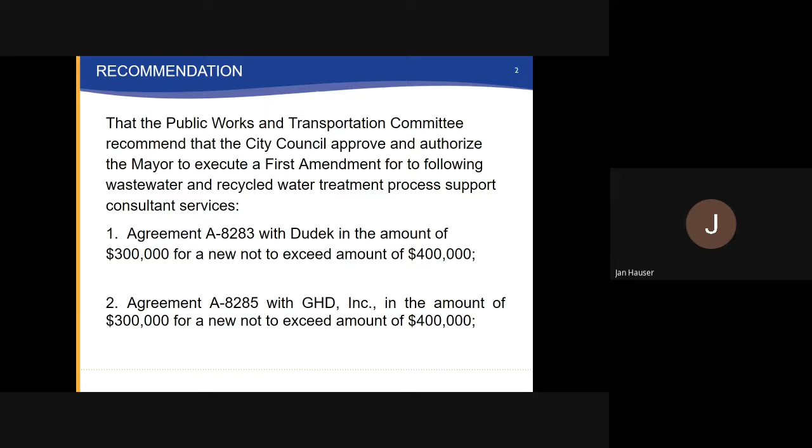One, Agreement A-8283 with Dudek in the amount of $300,000 for a new not-to-exceed amount of $400,000. Two, Agreement A-8285 with GHD Incorporated in the amount of $300,000 for a new not-to-exceed amount of $400,000. Three, Agreement...

A-8287 with Kennedy Jenks Consultants in the amount of $300,000 for a new not-to-exceed amount of $475,000. And Agreement A-8289 with Carollo Engineers in the amount of $300,000 for a new not-to-exceed amount of $475,000.

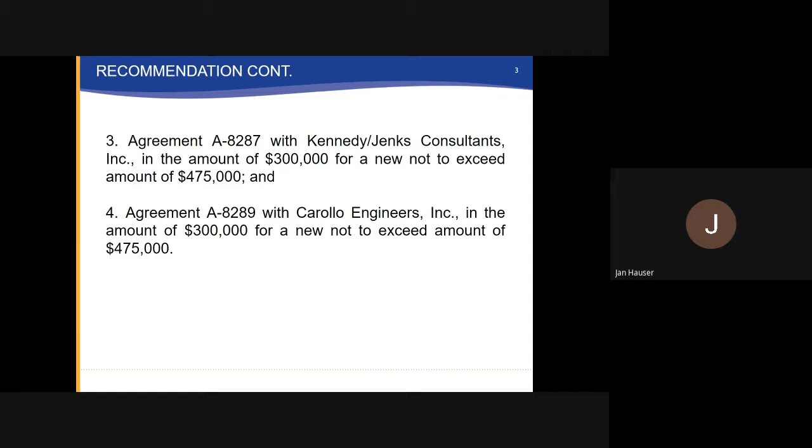As we all know, the city of Oxnard owns a wastewater treatment plant, which has a design capacity of 31.7 million gallons per day. It's a fairly complex operation. The treatment consists of a number of unit processes, including preliminary and primary treatment, secondary treatment, chlorination, dechlorination, and ocean discharge, among many other processes at the plant.

We also own the advanced water purification facility, which can produce up to 6.25 million gallons of highly purified recycled water per day. The AWPF is also a fairly complex operation, including microfiltration, reverse osmosis, and advanced oxidation treatment.

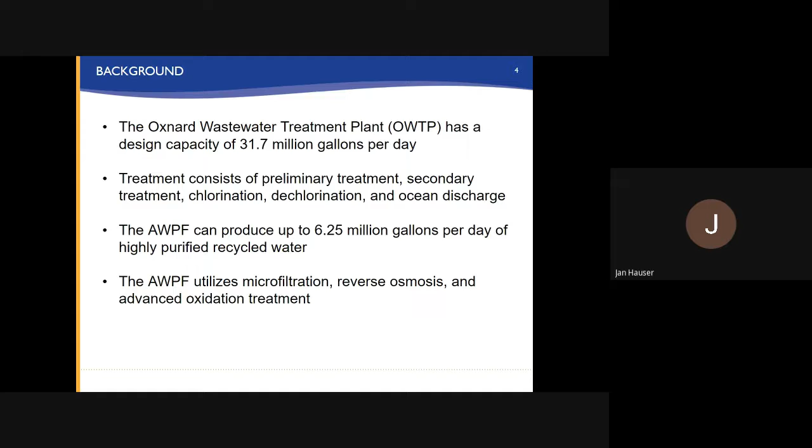On February 16th, 2021 and March 16th, 2021, so approximately one year ago, the City Council approved the following four agreements for on-call wastewater and recycled water process support.

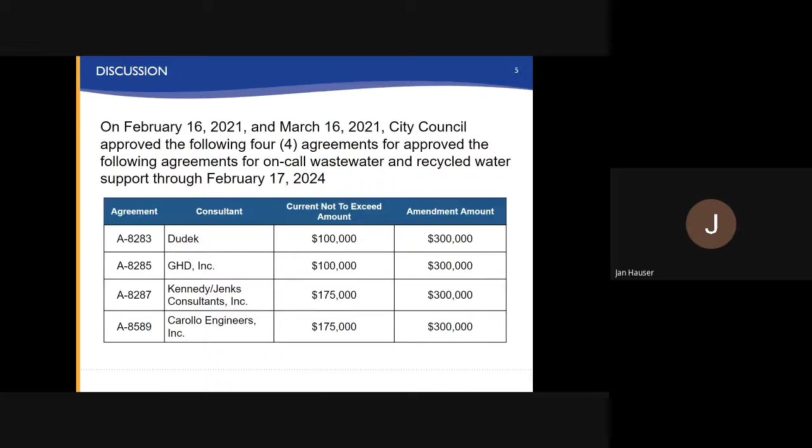Since that time, this has been incredibly useful and helpful. These have been very useful contracts for us. We've used all four consultants for a number of things shown here in this table.

We've done a flow meter evaluation at the wastewater treatment plant. We've completed a structural evaluation of a solids thickener at the plant. We have used Carollo for help with regulatory compliance. We've started to do underground utility mapping.

We are optimizing our new treatment facility called Chemically Enhanced Primary Treatment, which was just put in about a year ago and went online about a year ago. We've looked at backup power for one of our main pumps.

That evaluation has been completed. We're doing a planning study to expand our existing maintenance building, and we are in the process of developing site-specific limits for our existing industrial users.

Through these projects, we've used up most of the existing contracted amounts on each contract. So we see a continuing need for these services, and we are asking for additional amounts to be added to their contracts to complete studies, evaluations, technical guidance, consultation, and other things that may be required.

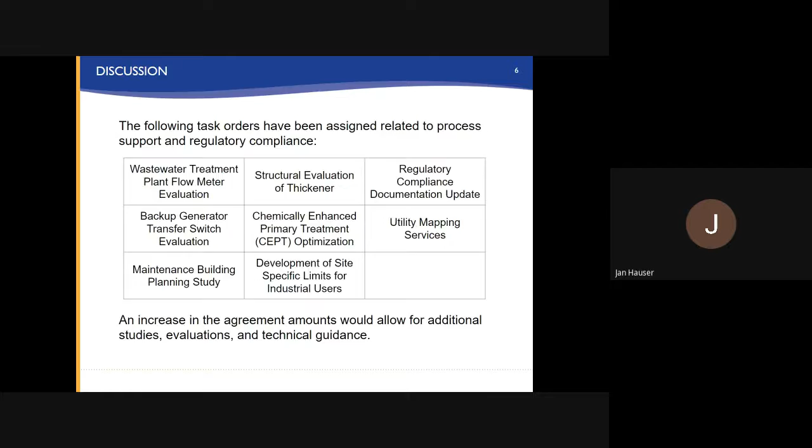I'm just going to show you a few pictures now of the facilities they work on. This is our chemically enhanced primary treatment facility. It went online, like I said, about a year ago.

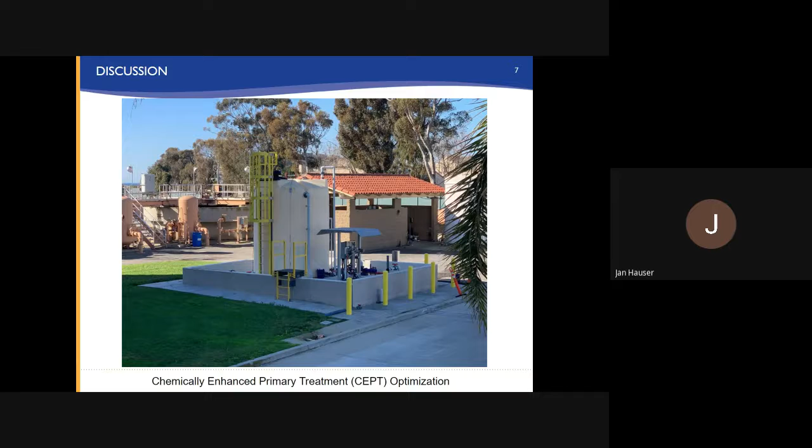There have been challenges with making it work properly, so we have one of our consultants, GHD, on board to help us optimize this facility. This is to improve our treatment process.

This is the primary solids thickener that we had a structural analysis done on. This facility was built in 1955, and we're about to put it back in service, but we wanted to make sure it was structurally sound. That has been completed, and we should be putting this back in service in the next month or so.

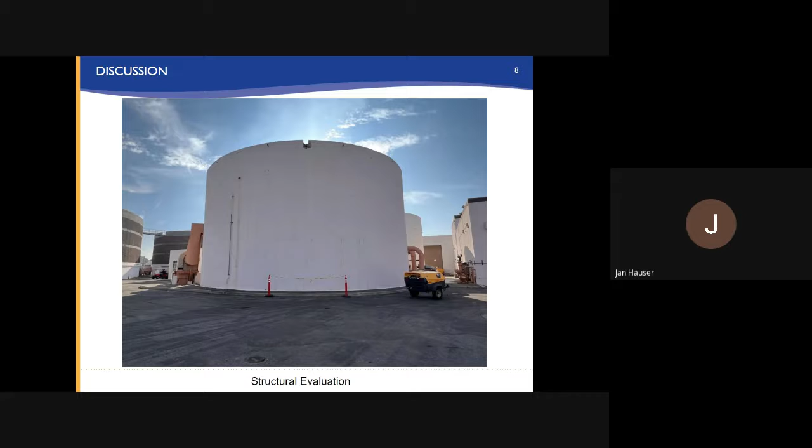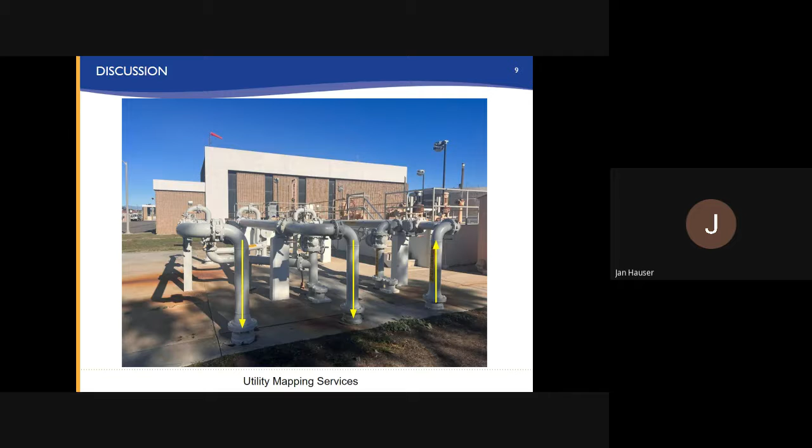We have undertaken a fairly substantial task to create a master underground map for the facility in AutoCAD. We are nearing the completion of that project.

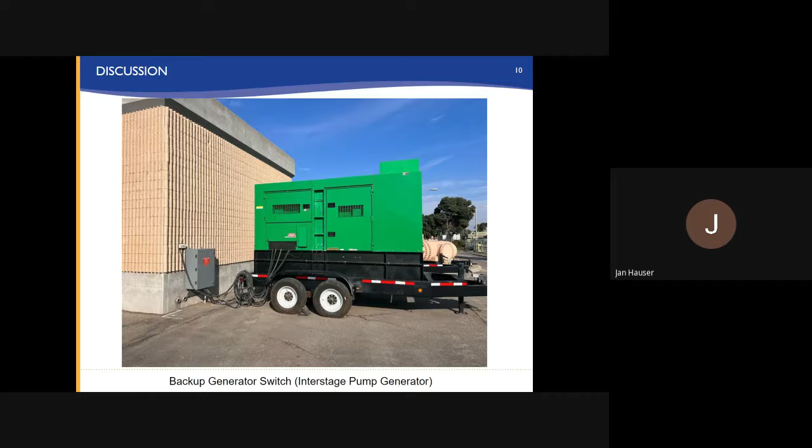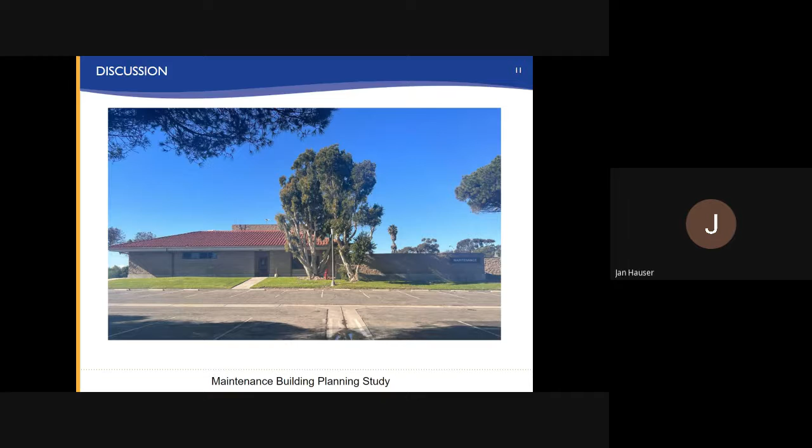This is our maintenance building. It was built in 1978. Staff has increased by more than two times since that time, and they are out of space. They need additional space, so we are having a study done to see if we can expand this facility in the future.

The financial impact: the total amount of each agreement shall not exceed the amounts listed below, through the term of February 17th, 2024, which is in their original contracts. That is not changing. Each project is done through a task order that we plan for every year in the budgeting process.

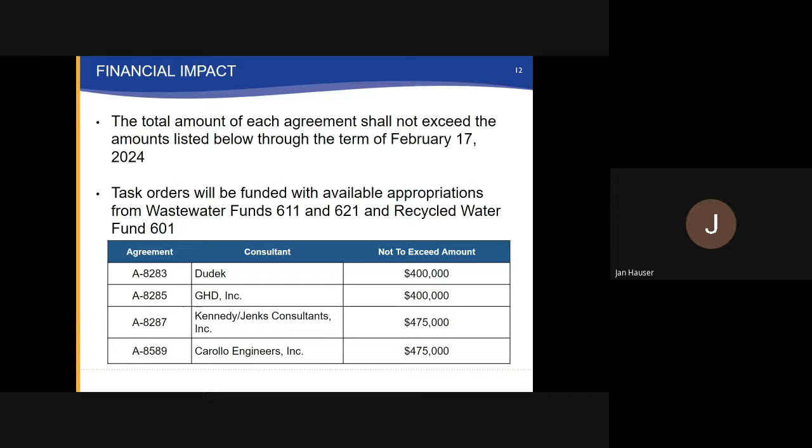That completes my presentation. I'd be happy to answer any questions. Thank you for your time.